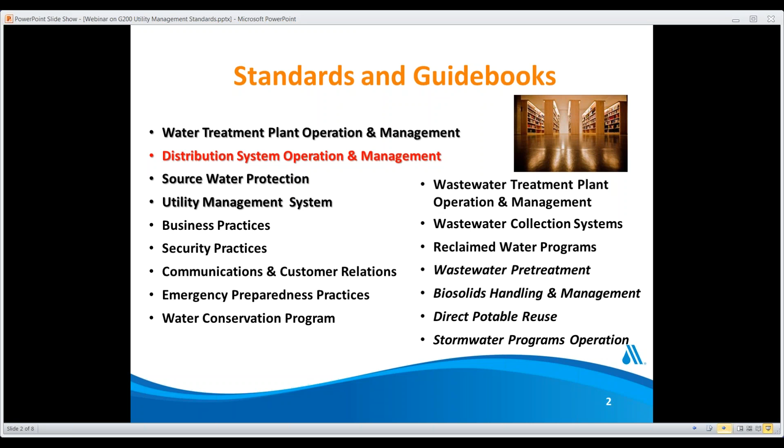A quick overview of the nature of these standards.

They are coordinated by the AWWA Standards Council and the AWWA Utility Quality Management Committee, which is composed of consulting engineering firms, engineers and scientists, utility operators and managers, and state and provincial regulators.

The Council and the Committee worked over a decade to bring together groups of experts for each standard and give those groups of experts guidance on how to construct those standards that would serve in several areas of utility functioning.

These groups of authors of individual standards, selected from utilities, consulting engineering firms, and state agencies, are well known in the drinking water industry. They're highly published, recognized in their respective areas of expertise, and they provided their time and expertise as volunteers in AWWA.

All of these standards developed so far in various areas of operations are constructed in the same format, guiding the reader to a set of items to be considered in a self-assessment.

These elements, those items to be evaluated, are non-regulatory, but they're set above existing regulations. So, for example, they indicate needs to develop standard operating procedures in some specific areas or to conduct periodic checks in other areas. They are ANSI certified and are reviewed every 5 years.

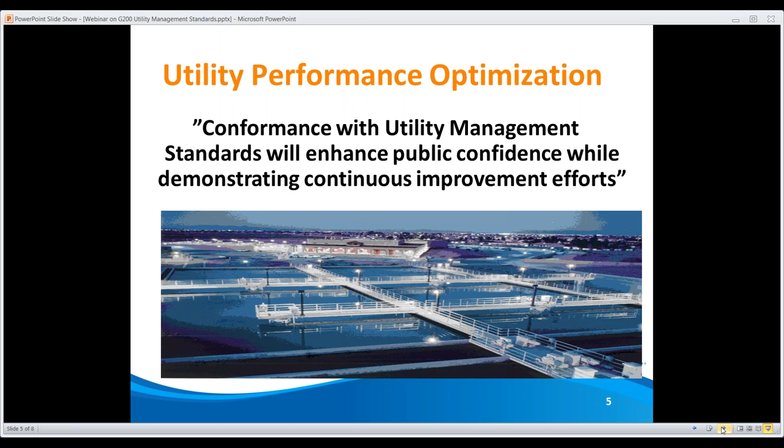I don't have to tell you that investment of time and money into optimization of utility operations brings huge benefits. It's a good investment.

Excellence in operations and continuing improvement are visible to the public and to public officials. They bring confidence not only to utility managers but also to the customers and the oversight agencies.

Optimization efforts provide continuity in seeking improvement and measurement tools for evaluating that improvement and in prioritizing elements of this continuity in optimization efforts.

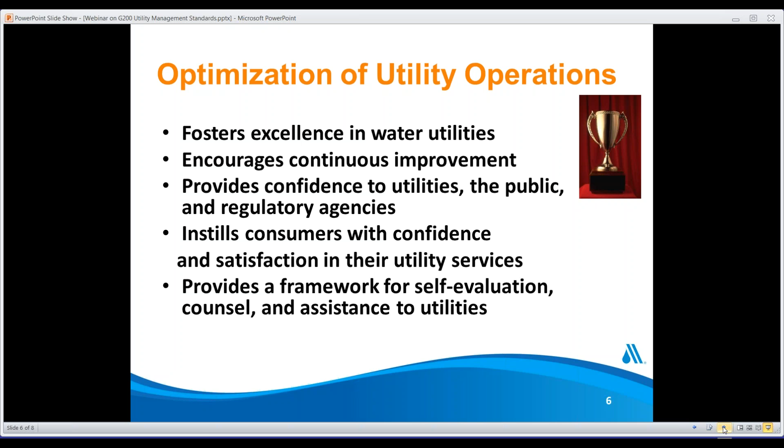So far, as of now, several water utilities in the U.S. have conducted self-assessments against several of those utility management standards. Some of the comments that were shared with us, with the Utility Quality Management Committee, stated that applying these standards to utility operations helps manage utilities in a way which guarantees peace of mind.

That's a big deal, to say it by a utility.

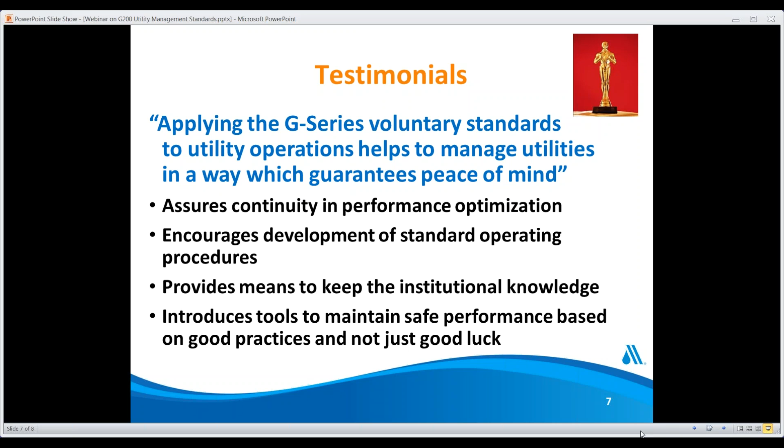Using the standards in optimization operations assures continuity in optimization efforts, encourages development of standard operating procedures, and having those SOPs in place allows new, young operators to possess knowledge that otherwise would be lost once older and more experienced operators retire. And finally, having and using a set of standards helps maintain safe performance based on a set of good practices and not just good luck, allowing operators, managers, as well as regulators to sleep well at night.

If Flint, Michigan had followed the minimum requirements for corrosion control monitoring and had a plan developed by the G200 standard, the catastrophe in Michigan could have been avoided. We very, very firmly believe in what I just said.

So we're dedicating this webcast to the standard, the second one in the G-Series family, the Distribution System Operation and Management, also known as G200. And Ken Oberoi, who is the Director of Water Distribution Department in Charleston, South Carolina, was chairing the group that developed the distribution system standards. And he also was the author of the guidebook developed to facilitate self-assessment against the standard.

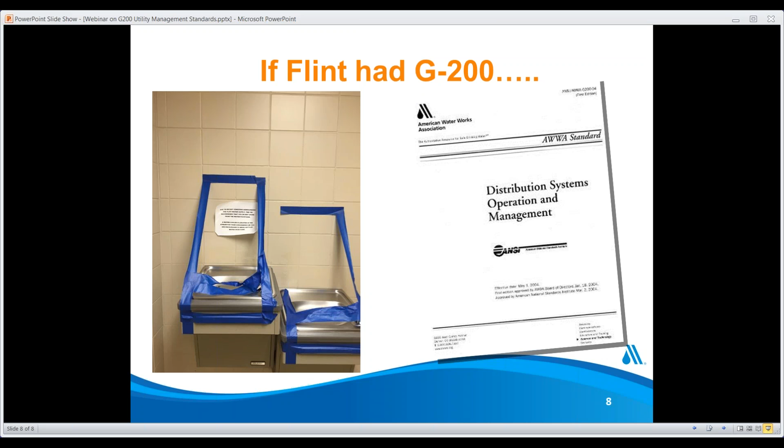Our next speaker is Ken Oberoi, who will take us through the G200 standard for water distribution systems operation and management and the benefits that it's provided to utilities. Like Ava said, Ken is the director of the Water Distribution Department of the Charleston Water System in Charleston, South Carolina. He has a master's in environmental engineering from the University of Alberta and is a registered professional engineer. He's got more than 25 years of experience in the operation and maintenance of state-of-the-art water treatment plants and water distribution systems in the United States and Canada.

He's a member of the AWWA Standards Council, chair of the G200 Distribution Operations and Management Standards Committee, and Direct Potable Reuse Standards Committee. He has served on various Project Advisory Committees for AWWA-RF projects, and he's credited with developing unidirectional flushing techniques and has helped his utility to become the first water utility in the nation to become ISO 14001 certified. Ken, I'll let you kick it off.

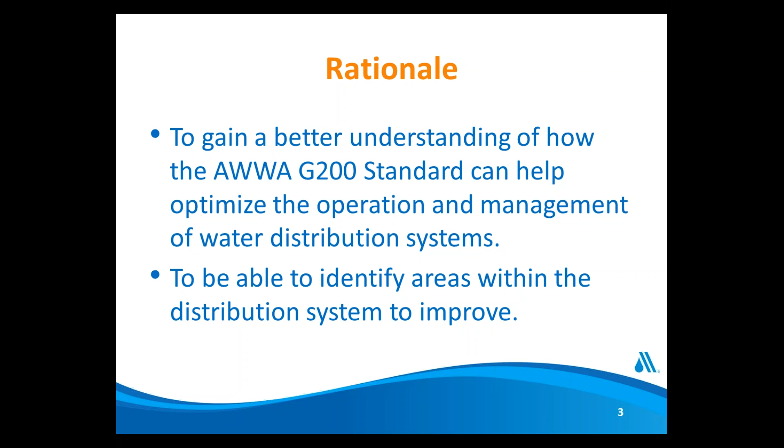We've been operating distribution systems for a long time and doing the best we can, but this standard sets up bars we have to cross to make sure our distribution system is operating at maximum peak capacity and most efficiency. And also we can use this standard to identify the areas within the distribution system which we can improve. The whole standard is written so that utilities can look at the standard, find out where they are, and how they can improve, giving them an opportunity for improvement. It's basically continuous improvement as you go.

What I'm going to talk about today is a presentation so you'll be able to understand what G200 is all about. I try to make it as simple as possible. I'm not going to go into too much detail. I know you're not the utility folks doing the nuts and bolts of the standard, but I'll give you enough information to understand what we need. And if you have the standard, after the presentation you'll be able to yourself, or help somebody, implement and incorporate the standard in day-to-day operation.

So the agenda today is to look at the overview. And after the overview, I'm going to talk about 4 critical areas, 4 critical requirements of the standard, and how to apply them in your own system, or how you can help somebody apply them.

Okay, the very first thing that I always talk about is a guidebook. It's a very good idea to get this guidebook. It's very economically priced. I'm not putting in a little infomercial for AWWA. Originally, it was published in 2009, and it's still available. And the current standard is 2015, and it still applies to most of the 2015 standard.

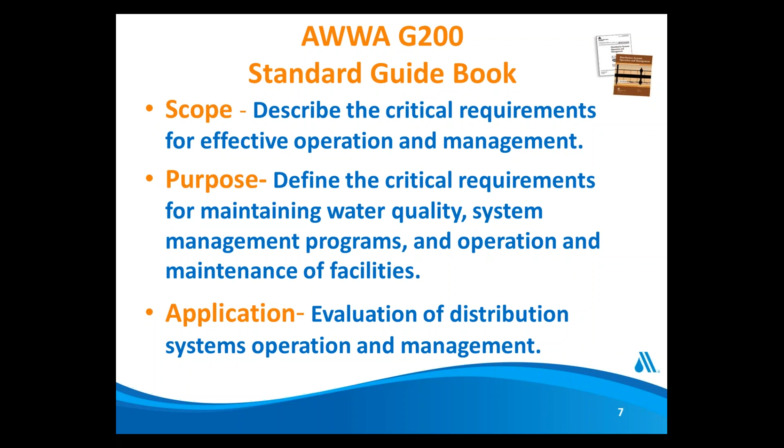The guidebook describes the scope, what the critical requirements are for how to effectively operate and manage the distribution system, and also defines the critical requirements for maintaining water quality in the distribution system, different management programs, and how to operate and maintain all the facilities associated with the distribution system. And it also gives the evaluation of where we are at, our operational management techniques and policies and procedures we follow, and how we can improve them.

Let's talk about the 4 different critical key requirements. Our biggest requirement is maintenance of water quality. Number 2, look at the system management program, which helps us achieve the water quality. And then we look at how to operate and maintain all our facilities in the distribution system at peak capacity, in the most optimized ways, to get the best value for the dollar, so to speak. And ultimately, we have to verify with an audit to make sure we do what we say we're doing.

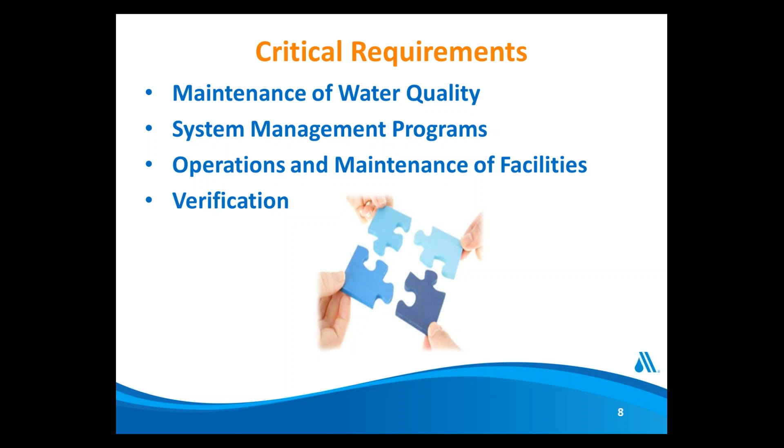Okay, I'm going to take the first one, the maintenance of water quality. Number 1, the standard calls upon compliance with all the regulatory requirements. As you know, health and safety is a critical part of drinking water. When a person drinks a glass of water, they do not think, well, should I drink it or not? Everybody drinks it. Your kids drink it, your family drinks it, loved ones drink it. So every time you pick up a glass of water, everybody should be able to say with 100% confidence, I'm going to drink it and it's safe to drink.

And I can say the same thing in a lot of other countries. And to do that, make sure all the applicable legal and regulatory requirements are met, that could be in the U.S. a state requirement or federal requirement, or in Canada a provincial requirement, or any other local requirement. In addition to that, the standard calls upon you to have a document to show requirements achieved. It's not just saying that requirements are met. You've got to have documented proof. And this standard talks about documentation throughout the process. Every time anything happens, you've got to have written documentation.

In terms of water quality, you've got to monitor the water quality. To have water quality monitoring, you've got to have a sampling plan. And the sampling plan has to be reviewed annually, data has to be analyzed and trends established, and you have to make sure the sampling sites are safe, they are not prone to contamination, and so forth. And they're located at the right places based on the hydraulic detention time, different pipe material, and whatever you need to do, you need to do.

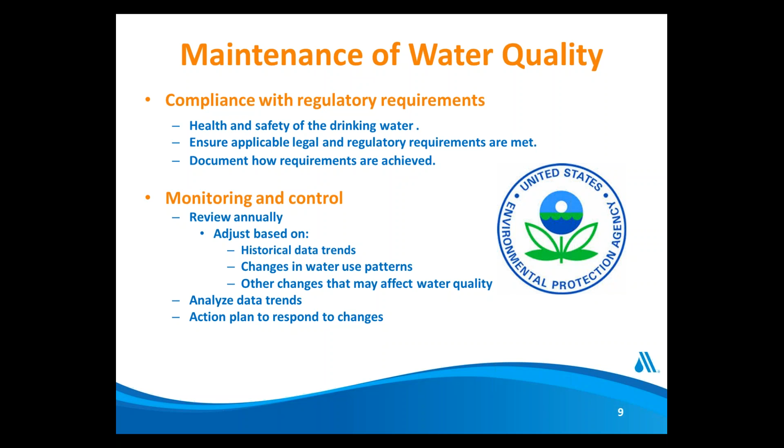You have to analyze these data trends, and based on the data trend, you've got to come up with a response plan. Basically, you've got to change the system preventatively. The whole standard calls for changing the distribution system preventatively because you don't want to be just like Flint. It's too late to change it. You've got to find the problem ahead of time and correct it before it becomes a problem.

Sorry, I'm going to go one slide further. Talk about maintenance of water quality. The standard says if you have disinfection residual maintenance in your distribution system, you've got to have a detectable residual at all points in the system at all times. How do you find out at all times? You have some sort of monitoring system where you systematically monitor manually or remotely to make sure you have a detectable residual. In addition to that, you have to monitor disinfection byproducts, so you can control and monitor them. And if something happens, you have to have a written action plan established to control it in case DBP levels exceed the goals, or you have a problem maintaining disinfection residual.

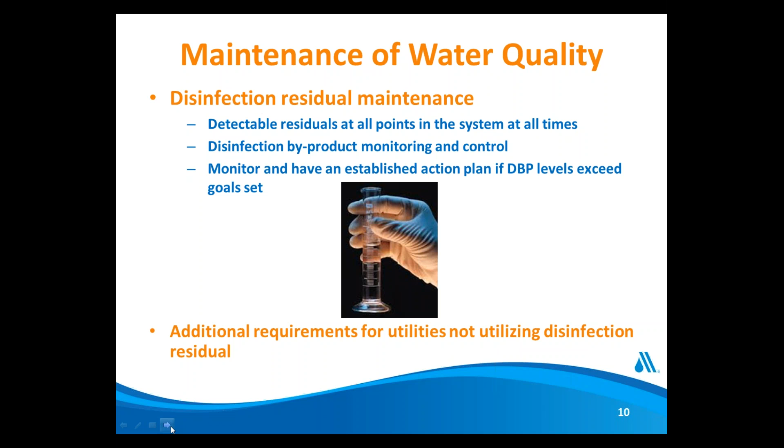Some of the utilities do not use a residual. There are additional requirements for them. They have to have HPC monitoring, making sure it's less than 500 CFUs all the time. And you have systematic monitoring processes there. You take samples and analyze them to make sure data is collected, analyzed, monitored and reported.

Let's talk about maintenance of water quality in terms of internal corrosion. Eva talked about Flint, and this standard goes into quite a bit of detail on these kinds of issues so we can avoid the situation in Flint and other places. It talks about a monitoring and sampling plan for corrosion-related parameters, and you have to monitor pH, alkalinity, conductivity, phosphates, silicates, calcium, metals, asbestos, and a bunch of other elements. And you monitor them preventatively in the distribution system. It's a little bit beyond the legal requirement we have currently.

You've got to inspect your water distribution mains every time you expose or cut a pipe. You look at the internal pipe, what condition it is in, and if the condition is not satisfactory, there are criteria for how to evaluate the internal condition of the water main, a condition assessment tool, which is built into the standard. And there are detailed procedures to control lead and copper levels in the distribution system. In addition to that, there are guidelines for controlling the other corrosion-related byproducts in the distribution system. And this inspection has to be done every time you have a cut in a pipe, or you are doing corrective maintenance of a main break, or adding to or modifying a distribution system.

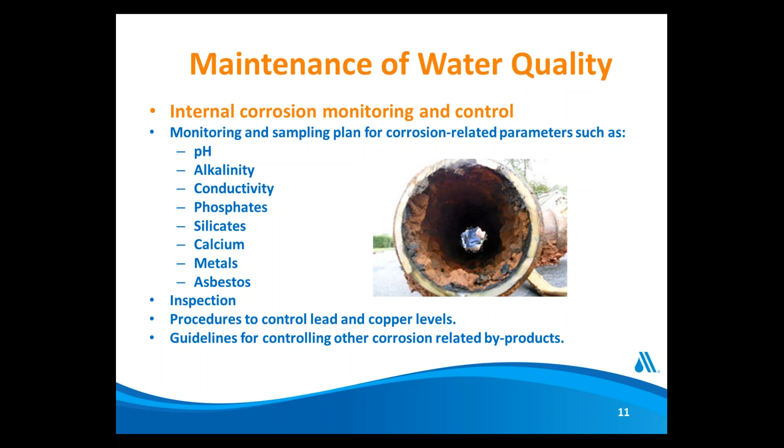Okay, I'm continuing on maintenance of water quality. In addition to that, you have to be concerned about aesthetic water quality requirements, which could be color and staining. And in addition to that, there's a requirement for health-related taste and odor. Regarding color and staining, you've got to make sure you take the water sample.

Every time the customer calls you, make sure you take the call. The people who are taking the call or responding to this call are trained personnel. It has to be done with timely resolution of the concerns and problems. You have to collect the data and track the data, plot the data on your distribution system profile, and find

the trends. Where are all these problems happening? What can we do with this problem? If the problem exists throughout the distribution system, then you need to come up with a plan for how to resolve or remedy it. If the problem's only happening in a certain area of the distribution system, you have to find out what's going on, do an in-depth analysis, and correct these problems.

Similar to color and staining, you have to go about the taste and odor and other issues occurring. To do that, you have to have a sort of 24/7 inquiry call system where any customer can call in 24/7 and report a concern. Of course, I talked about the trained personnel. Some of the calls that come in, trained personnel can resolve over the phone if the dispatcher is qualified.

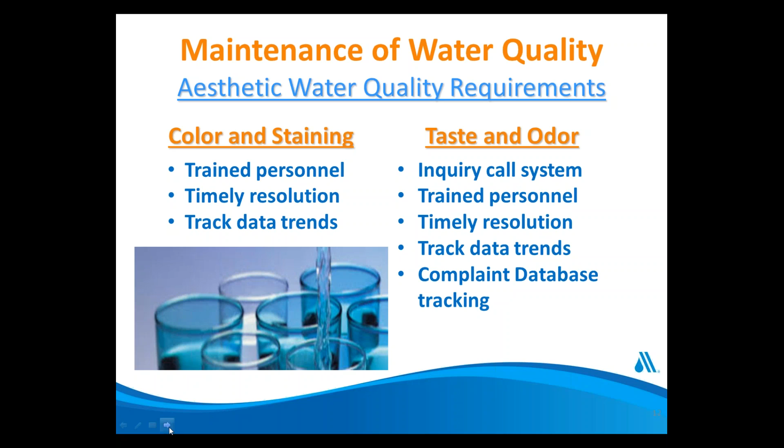I'm going to talk a little bit more from a customer relations point of view, because customers are the most important of these things we have in our distribution system. Basically, our distribution system only exists because of our customers. I always say in our department, there's nobody's supervisor, nobody's boss. Our real boss is our customer. So we are here to make sure the customer is taken care of.

So to do that, you've got to learn about the customer: what kind of customers call you, what kind of inquiry types they have. Find out what happened, what the results were, and how you resolved the inquiry. And you have documented everything. Then you find the trends, resolve those trends, take care of the customer, and communicate with them. You can communicate with them in various ways. You can have surveys, stakeholder meetings, focus groups, whatever you want to do.

But you have to have an annual goal, as the standard talks about, to reduce the number of customer concerns or complaints. If we have complaints this year for certain areas, we're going to have an objective for next year on how we can resolve and reduce them. Again, like I talked about, this standard is all about continuous improvement, finding opportunities for improvement and improving continuously. It doesn't matter where you are; you could be at a lower level of the standard, but as long as you keep on improving, you're going to be at the top of the standard one of these days.

To do that, what this standard emphasizes as a major impact is a preventative maintenance program in the distribution system, which is basically a system flushing program. I call it systematic flushing. You can call it unidirectional flushing. It still has to be done right. Sometimes you need spot flushing for staining or color calls or water quality concerns, but the standard calls for unidirectional flushing, basically a systematic approach to maintaining water quality in the distribution system.

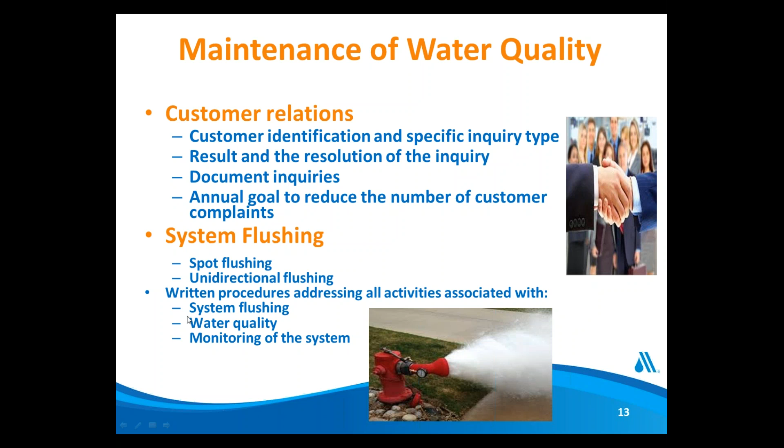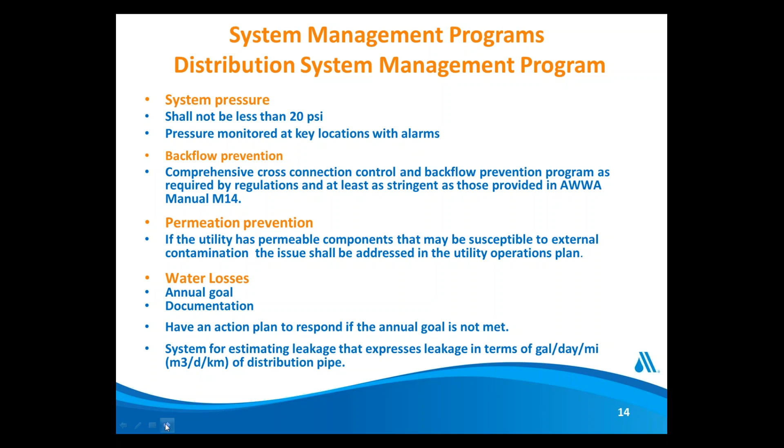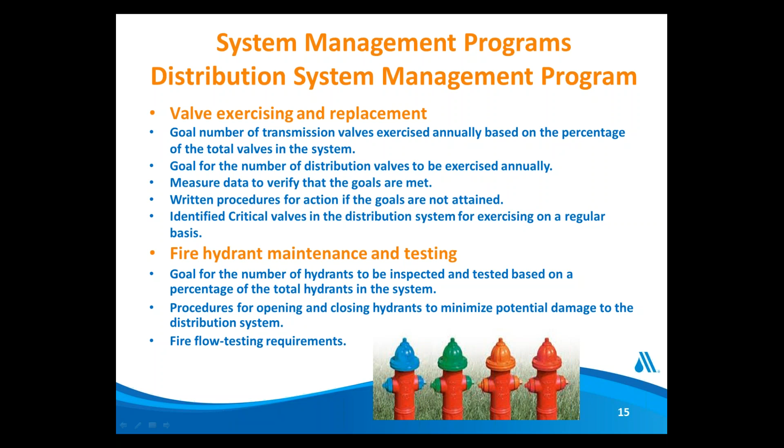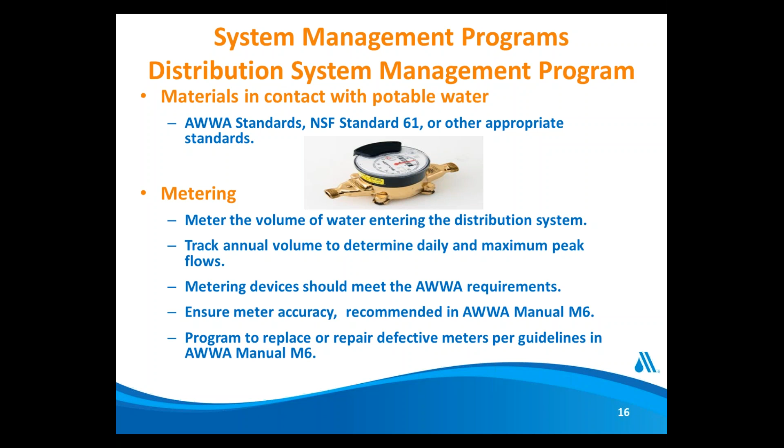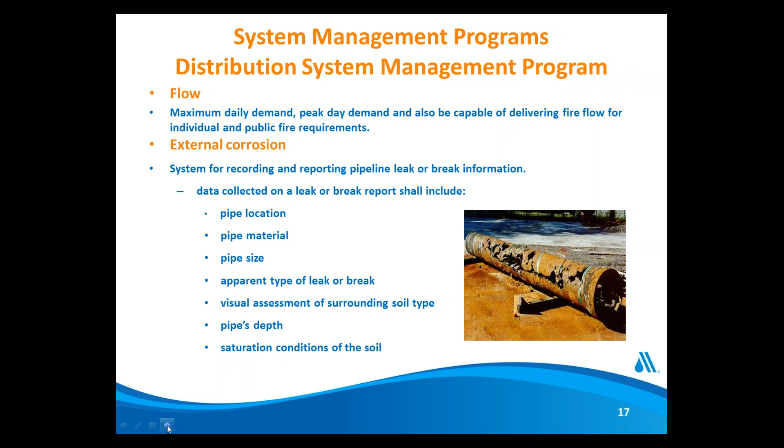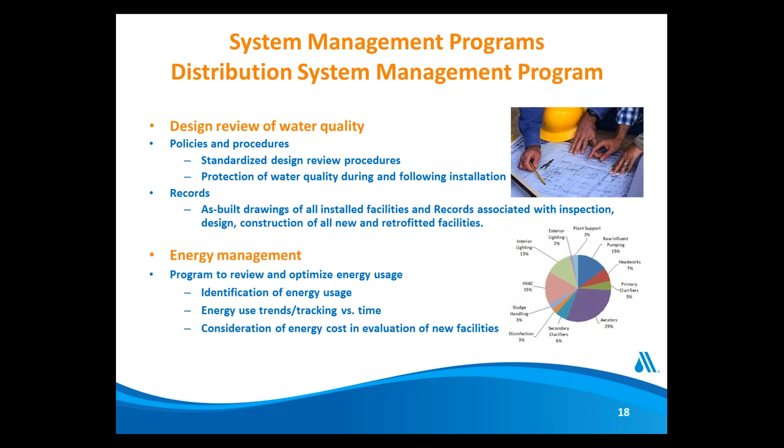The standard also talks about energy management. It identifies what kind of energy you're using right now and provides opportunities for how you can reduce energy consumption. You need to identify everywhere you use energy, what the trends are, how you track over time, and how you can reduce energy usage in operations and in all the facilities you're maintaining for the distribution system.

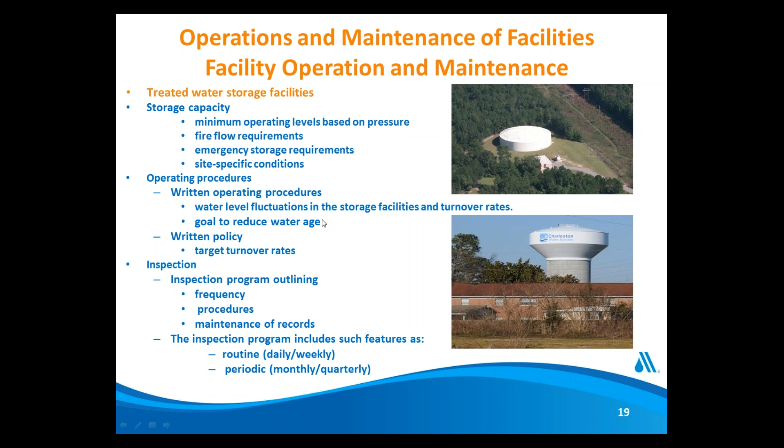The standard also talks about inspection - all facilities have to be inspected. You need inspection programs that specify how often you inspect them and what detailed procedures you're going to use. These should be recommended by AWWA manuals as well as manufacturer's recommended procedures. You have to maintain records every time you inspect the facilities. The standard also says you must inspect reservoirs to make sure they're safe and secure. This inspection program should include routine inspections - daily, weekly, monthly, quarterly, or annually, and thereafter.

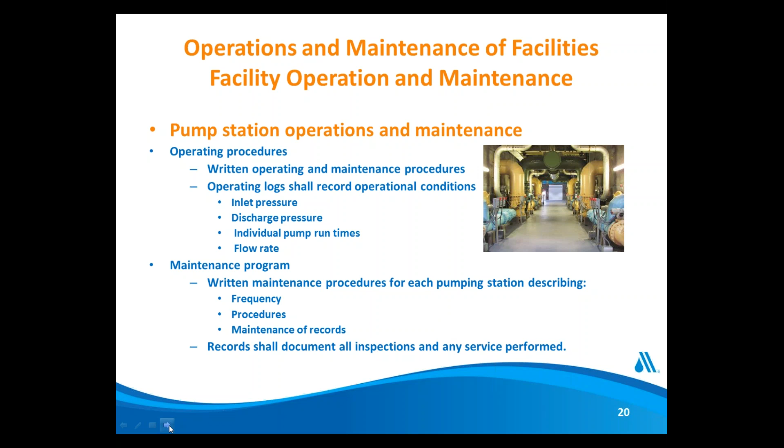Similar to the other facilities, the standard also talks about pump station operation and maintenance, again with major emphasis on written operating procedures. You need an operational log covering inlet pressure, discharge pressure, individual pump runtime, and flow rate, for example. Then there's your maintenance program - every time you do maintenance on equipment, you've got to document it. You need written procedures, performed by qualified people following qualified policies and SOPs as recommended by manufacturers. It also covers a comprehensive preventive maintenance program for all pump stations, keeping records, and rehab and replacement programs. Again, records shall document all inspections and any service performed on pumps and associated facilities.

The standard will go into a little bit more detail in terms of operation and maintenance of the pipeline rehabilitation replacement program. Once you install a distribution system, it's going to stay as is for a long period of time. As you know, you have to rehab it, replace it. You're talking about a program in detail for evaluating existing portions of the distribution system. Condition assessments are a must.

We use in Charleston a 17-parameter condition assessment. Based on this condition assessment, we have a comprehensive computer program which evaluates and prioritizes our pipeline rehab and replacement program. The Research Foundation has done quite a good job. They have a lot of information available to them. Every utility should use that, and the standard calls for it.

Some of the records you have to keep to have these kind of programs: you have the system maps, you have to find a long-term history of leaks and breaks, repair type, pipe condition assessment, joint condition assessment. You have to find out fire flows, C-factor tests, pressure gauges, other pertinent data you collected remotely or manually. In addition, environmental information of location, hazardous material on site, soil condition, what's going on. You got to have proper separation between potable lines and other pipelines, old stuff, and any hazardous material sites you have to make sure you keep track of.

In terms of main breaks, you got to look at the goals in terms of breaks per 100 miles per year, or breaks per 100 kilometers per year for Canada and France, over the distribution system. You can collect as much data as possible, apply that data to the existing distribution system, and find the worst pipe or what we can do.

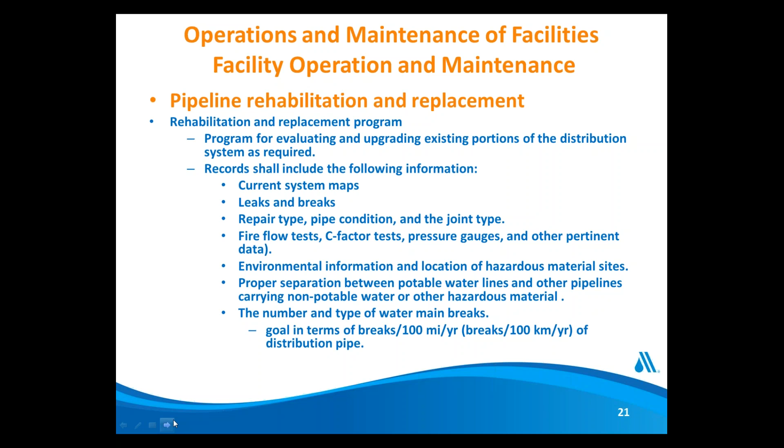Once you find the pipe, if something needs to be done, then you have to apply the criteria: can I replace it or rehab it economically? So apply whatever you need to do. That has to be done comprehensively, and that's what the standard calls for. That's basically talk about this.

Keep going in. Basically, once you rehab and replace the distribution system, or any type of water main has been exposed to the outside environment, and cut and replace the water pipe during maintenance activities or new construction, the standard calls for disinfection of all the pipes. It has to be done as per the AWWA standard, and you have to have bacteria testing done as per ANSI/AWWA C651.

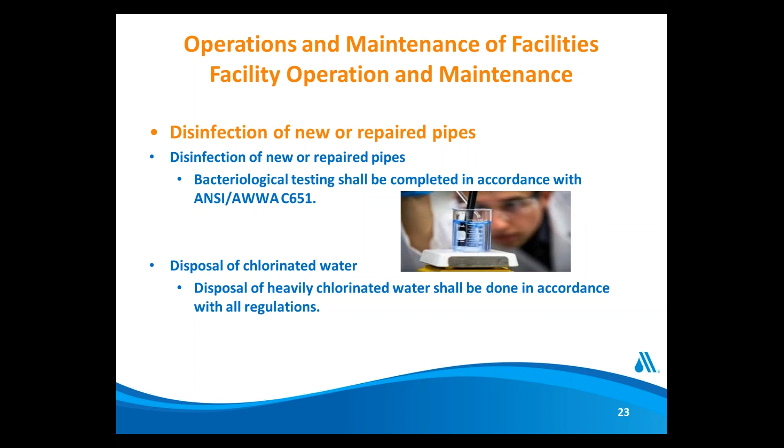While you're disinfecting the mains, you have superchlorinated water, you have to dispose of it adequately, and that disposal of that chlorinated water should be in accordance with all the rules and regulations, and the standard goes quite a bit in detail.

The last component of the distribution standard, basically for the distribution system operation management, is that you need documentation. You have to define all the critical activities you're performing on your distribution system into preventive maintenance and corrective maintenance. You have to create a written procedure for each of those. You have a training component built into it.

Each of those policies and procedures has to be available to all the operators and all the employees, and those people, whatever job they're doing, should be adequately trained on them. Then you have a record-keeping system to measure compliance with the distribution system. The documentation could include quality policy and quality objectives, what you're trying to achieve in your distribution system. You got to have a standard operating procedures manual which lists all the procedures, and these procedures have to be prepared as per recommendations with the manufacturers and as a collective, sitting down together with all the operators and using everybody's brain, to arrive at consensus operating procedures.

Any procedure required by this standard needs to be documented and available, to document and ensure effective planning, operation, and control in this process. Planning is key to the standard. Everything you do as per the standard, you have to plan it, do it. We call it plan, do, check, act, basically.

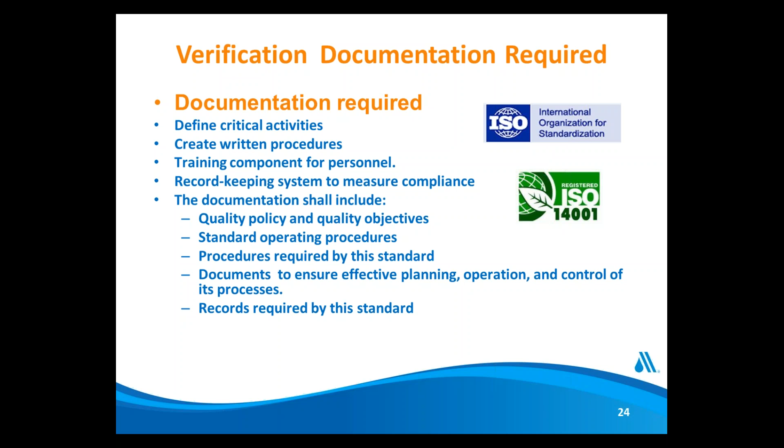You plan it, then do it, you check what you did, then act on top of that to make sure anything that went right or wrong is addressed, and you do that self-assessment and keep doing it, and you stay in a continuous improvement cycle mode, and you keep improving it. And you record everything that you did as per the standard.

The verification basically required, you had done all those things, you will make sure the most important resource in the distribution system is our people. The personnel performing the work in the distribution system should be competent on the basis of appropriate education. They have a licensing requirement, what license they need for the distribution system.

They have adequate training, they have all the skills, and their testing requirement makes sure they're keeping this knowledge in their head to make sure they're performing the job to the peak, as you have experience as required by the governing agencies, whatever you need.

Okay, applying that standard, here's what you can get out of it. I think Eva talked about all the good things, but what do you get from it for me? It shows continuity and performance optimization. It guarantees development of standard operating procedures. Then there's brain drain - it provides a means to keep institutional knowledge after employees' retirement. And the biggest of all, it allows you to maintain safe performance based on good practice, not just like Eva talked about. I truly believe in that. Thank you.